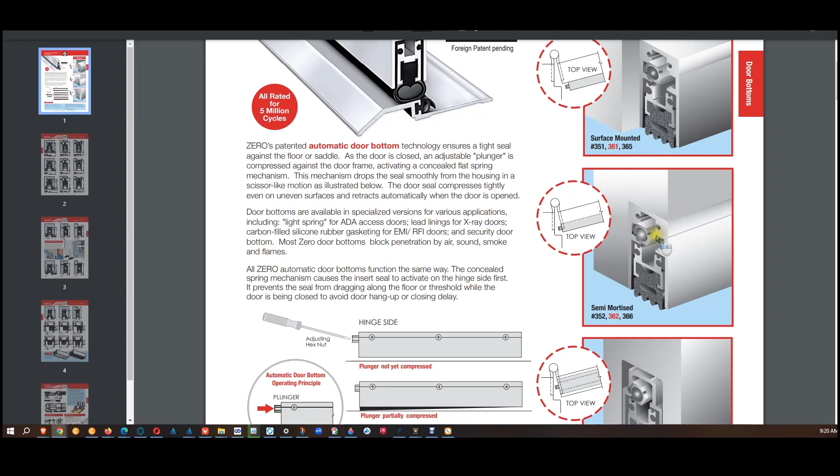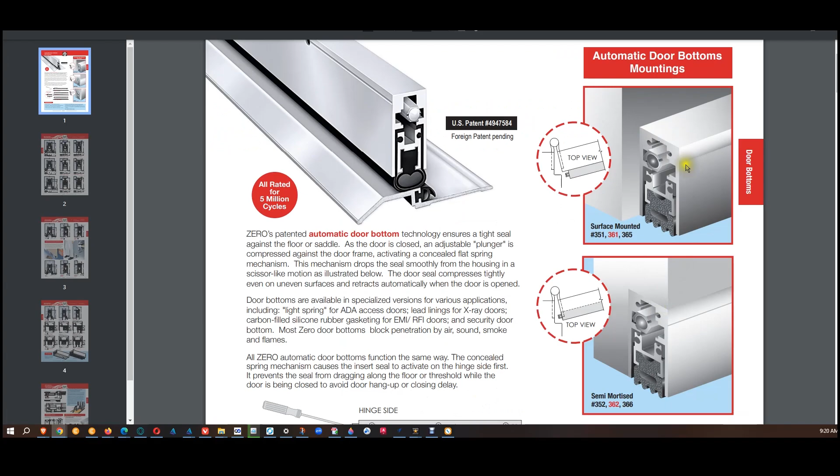Okay, fine. This is what it looks like semi-mortising it. You can take that same surface mount model and now mortise the face of the door. Make it flush. Why would you do that? Possibly because very often this is 15/16 thick, so it's almost an inch thick. Well, that's a lot of material to have projecting off the face of the door, so that when your door goes from 0 to 90 degrees, let's do a little experiment, 32 inch, right? That's the clear opening space required for ADA compliance.

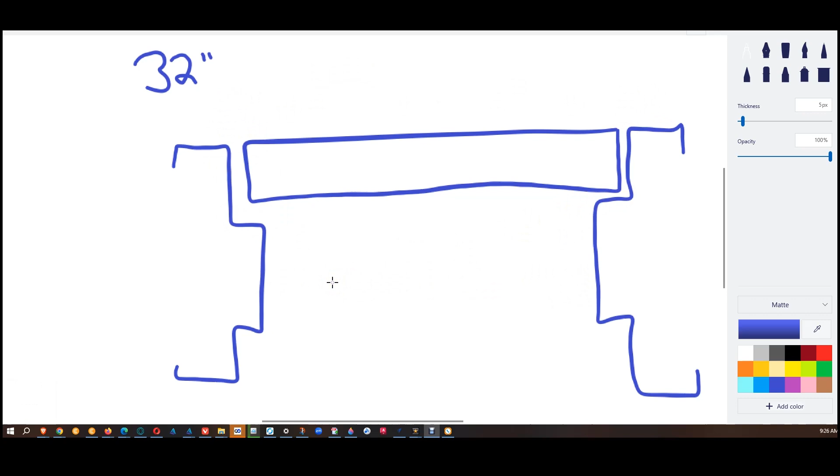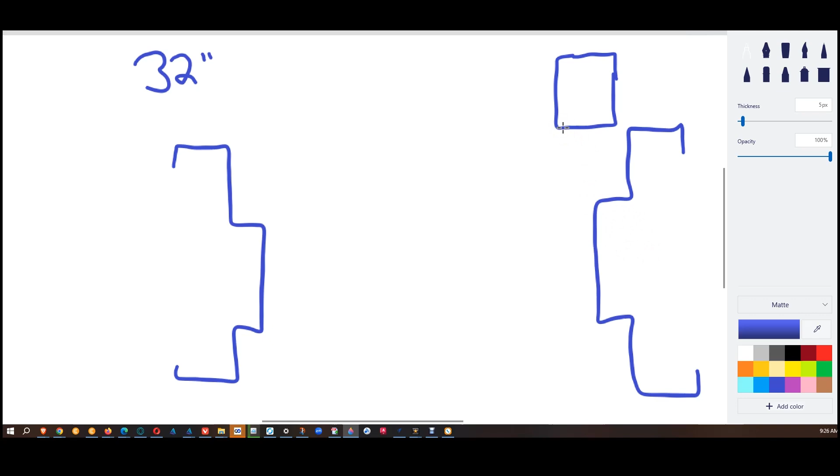Let's do a little experiment here. Here's your door. Now that 32 inch comes into play because we have to have a clear opening of 32 inch. Okay, so if this is 36 inch, let's just say, 36 minus inch and a quarter because these are 5/8, that's going to be 34 3/4. Well, the issue though is the door is going to encroach into the opening ever so slightly, and I'd need to drop that into AutoCAD to know exactly what that is. But let's say that it encroaches into the opening a 1/2 inch, and I'm just using hypothetical, fairly accurate numbers. So we're at 34 3/4 minus a 1/2 inch, 34 1/4.

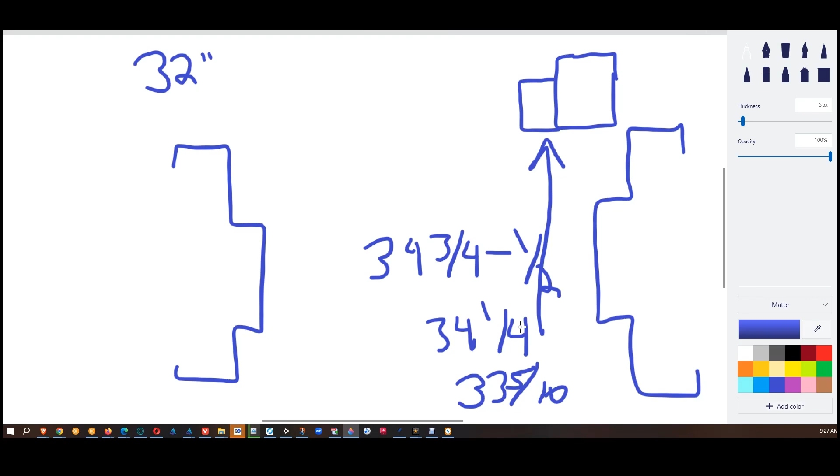Now you got 15/16 worth of door bottom. That's going to put us at 33 5/16. So you're still clearly okay, but you wouldn't be if this was a 2'10" door. And the 1/2 inch is a guess. You'd have to check that. But the point is, do you want the door bottom encroaching into the space? You see it on hotels very often. Usually the automatic door bottoms that I see on hotel doors that are surface mounted are the ones that are most beat up. They'll be abandoned in place sooner or later.

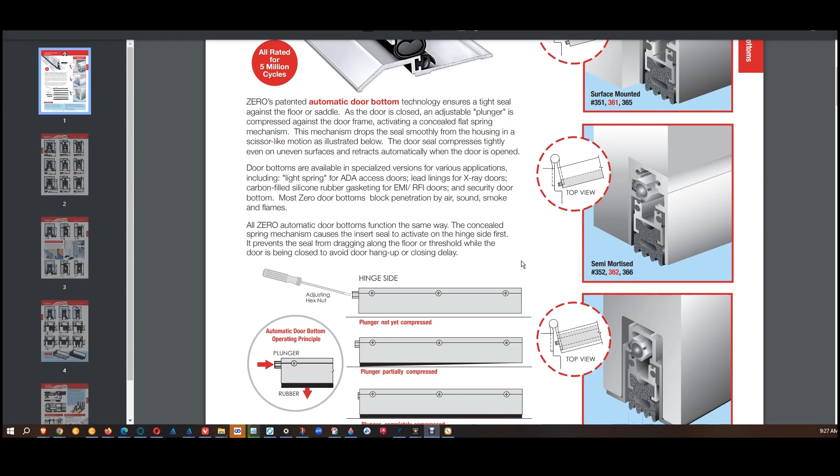There's the Hilton Hotel at O'Hare Airport. It's at the airport. Been there for 40 years. All of their automatic door bottoms were surface mounted and abandoned in place years ago because they're surface mounted, and they're not nearly this thick, but they just take a beating, and you can tell.

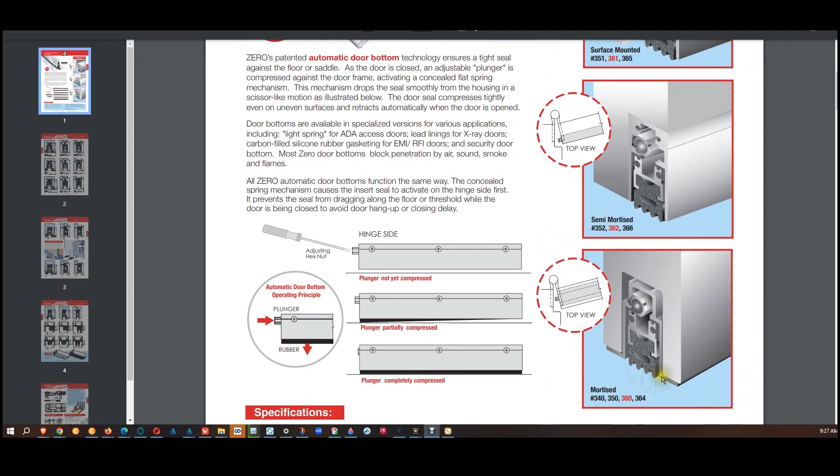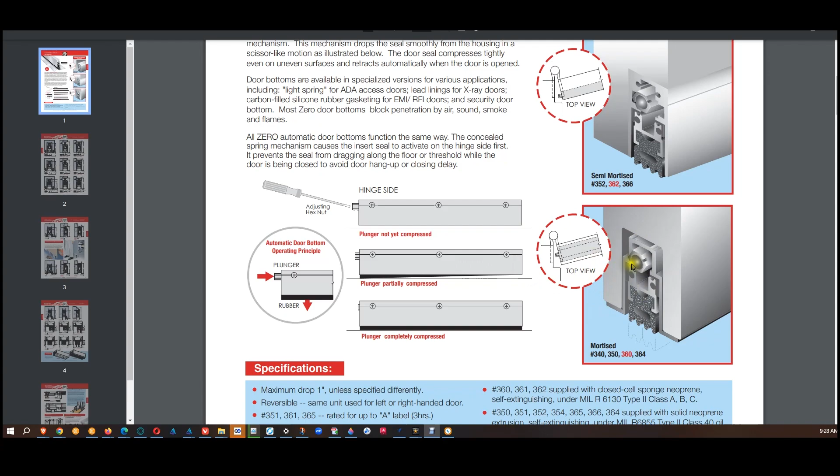And then obviously mortise style. The advantage of this is that you don't see it, and it can't take a beating because it's hidden and concealed, and it won't be a problem for ADA in terms of projecting hardware. It could be an issue where you need to think about ADA compliance with reduced opening forces. They do make automatic door bottoms with reduced force on the plunger, so you might want a low closing force model. Zero does offer them. And in fact, if I was using closers, I'd probably always use them.

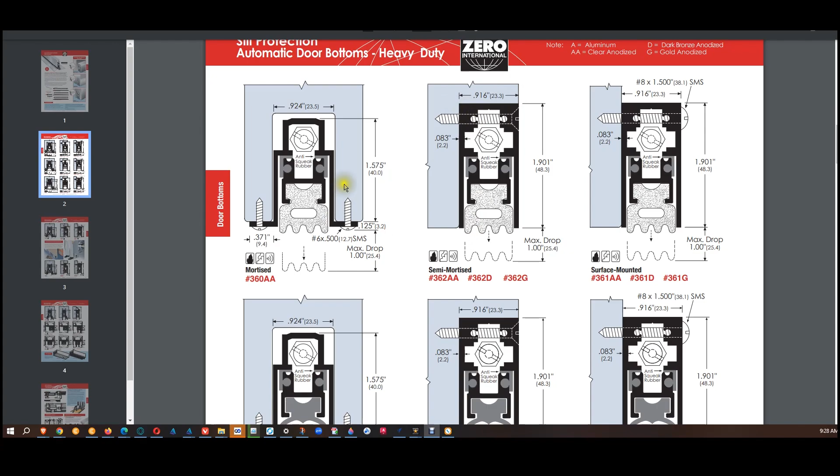But as we scroll through the rest of the product catalog, right here we see a cross section. Surface mount, semi-mortise, mortise. I might call this a dado. I'm really not sure. This would certainly be a mortise. This would be mortise. It'd be like a rabbeted edge, but there it is. This is a mortise, like a hinge is mortised. This, I don't know that I would call that a mortise. I might want to call it a dado. Now you know the rest of the story.